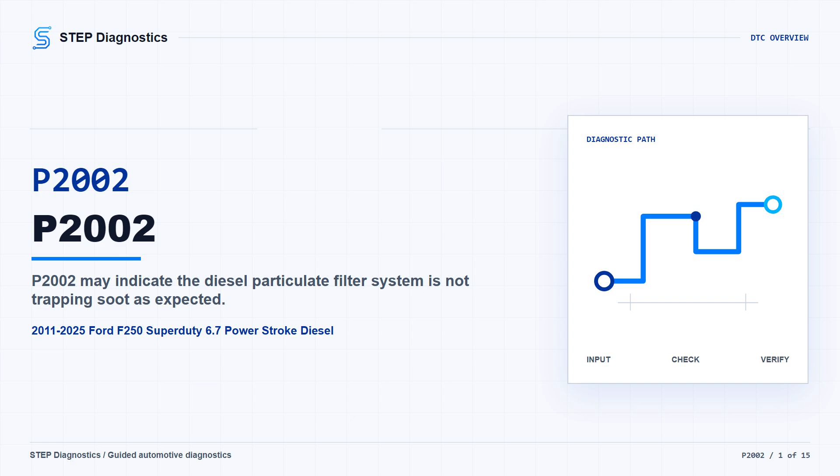Start with the basic system checks. If other engine control codes are present, handle those first before chasing P2002. Also repair any base engine concern before making particulate filter repairs, because coolant leaks at the EGR cooler, leaking injectors, oil consumption, or excess fuel in the exhaust can damage the filter and set this code.

If the PCM was reprogrammed or replaced before you got here, drive the vehicle for 8 kilometers, 5 miles, so the DPF PID data can update.

Fuel quality matters too. This vehicle calls for 20% or less biodiesel. One monitor gate to keep in mind is 150 miles, 241 kilometers, after the first incomplete regeneration. And if regeneration starts during testing, let it finish before continuing, because the readings can be biased during regen.

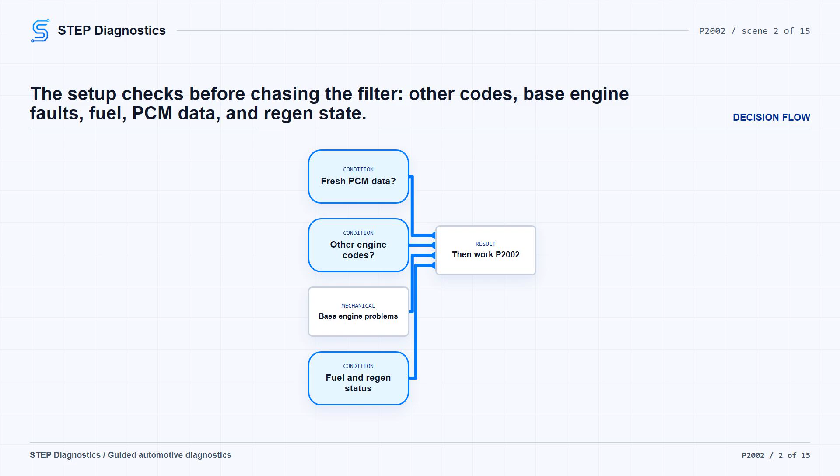Look over the PM11 module, PM11 sensor, PM11 wiring and module grounds for heat damage, harness damage, wrong routing, wrong connections, and poor frame ground connections. Also check for exhaust leaks at flanges, gaskets, and the PM11 sensor, and consider radio frequency or electromagnetic interference.

Next, look for contamination sources: unapproved silicone sealers, excessive oil consumption, internal coolant leakage, or unapproved cleaning agents. If a contamination source is found, fix the source, change the oil and filter, clear the PCM codes, and retest.

If that side stays clean, disconnect the PM11 module connector, turn the ignition on, and check C4861 pin 4. The voltage needs to be greater than 10.5 volts.

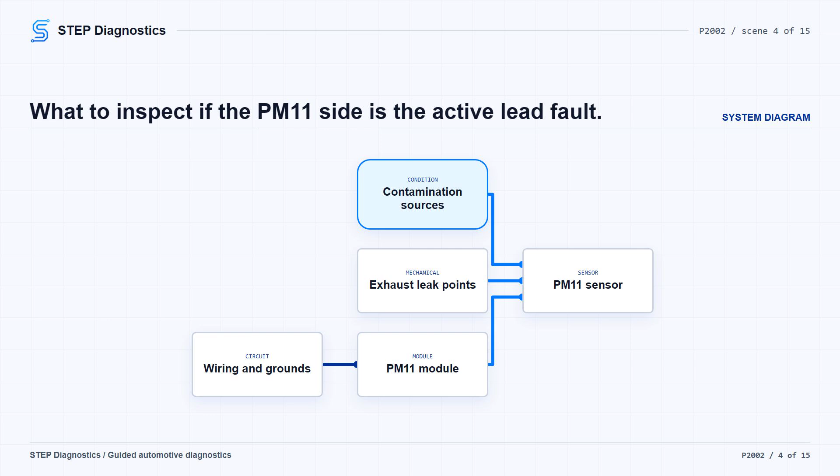Then, with the ignition off and the BJB-C connector disconnected, check the VPWR and ground circuits for excessive resistance. The passing value is less than 5 ohms. For the PM11 module open circuit checks, the passing value is also less than 5 ohms.

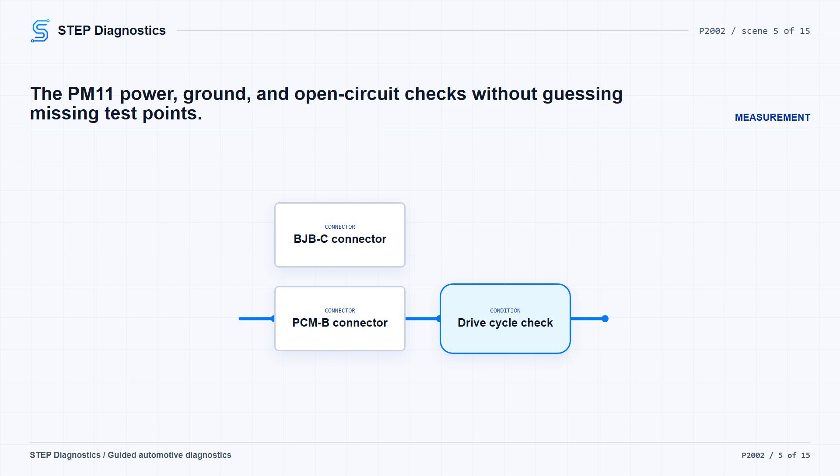If the circuit checks pass, carry out a drive cycle. If codes return, unplug the PM11 module connectors, inspect for pushed out pins and corrosion, reconnect them fully, and see if the concern is still present.

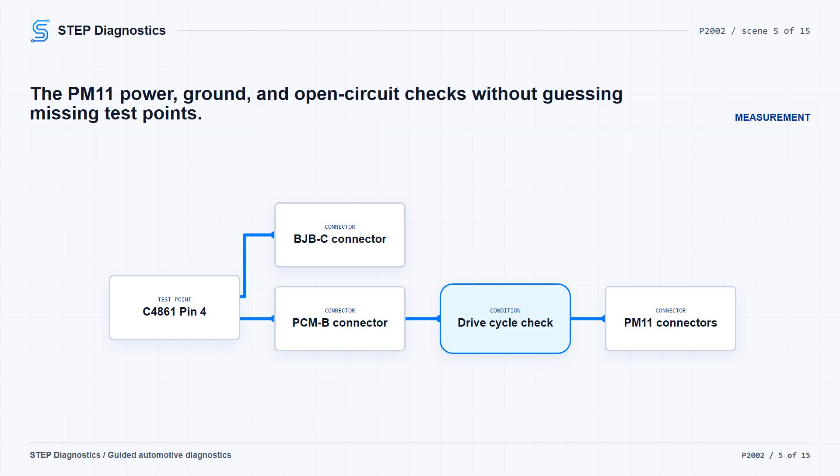If it is, the shared path supports installing a new particulate matter Bank 1 Sensor 1 module. If it is gone, treat it like a loose or corroded connector issue.

If no listed codes are present, the next check is for incomplete regeneration history. Watch the dist last regen PID. And if the dist last DPF value is between 100 kilometers, 62 miles, and 804 kilometers, 500 miles, the fault may not duplicate right away.

In that case, check for loose connections, damaged or corroded terminals, and wiggle the harness to try to bring the concern back before clearing codes and retesting.

If the pressure sensor side is the active branch, start at the DPF P11 sensor. With the ignition off, disconnect the sensor, inspect for pushed out pins and corrosion, then check the hose for leaks and the sensor port for restriction.

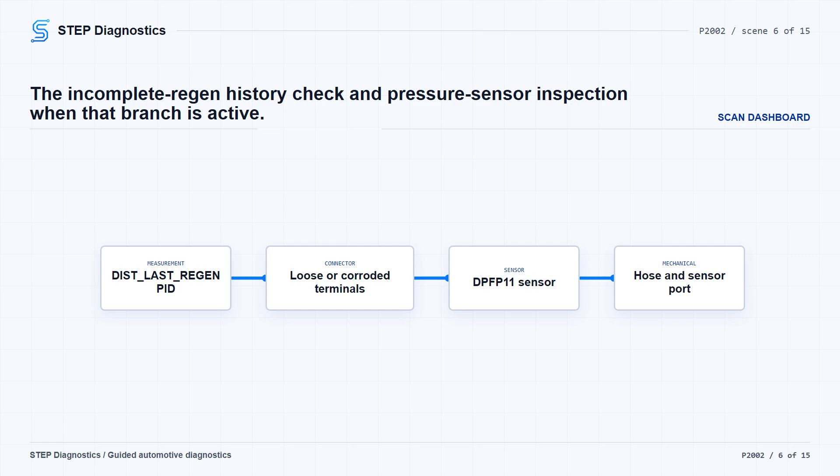Next, check VREF and SIG-RTN by measuring between C1471 pin 2 and C1471 pin 3 with the ignition on. The expected range is between 4.5 volts and 5.5 volts.

If the branch keeps going into the DPF signal circuit, disconnect the PCM-T connector and check for a short to SIG-RTN or ground. The resistance should be greater than 10 k ohms.

Then, check the signal circuit for an open between C1471 pin 1 and C1232T pin 81. The passing resistance is less than 5 ohms.

After that, check for a short to VREF between C1471 pin 1 and C1471 pin 3. The resistance should be greater than 10,000 ohms.

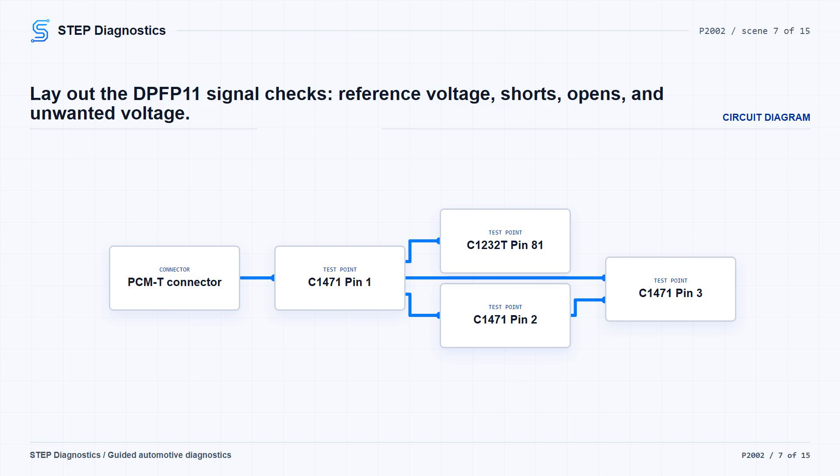Finally, with the ignition on, check C1471 pin 1 for unwanted voltage. If any voltage is present, repair the short and retest. If no voltage is present, save the PCM connector operation check for the end of the path instead of guessing.

For P2002, the path moves directly into checking for a damaged diesel particulate filter and exhaust system issues. With the ignition off, inspect the exhaust for aftermarket accessories, performance modifications, a damaged DPF, leaks, cracks, punctures, leaks in the DPFP11 sensor connecting hose, and tailpipe modifications that could change exhaust restriction.

Then remove the EP sensor and the EGT11 sensor. Temporarily plug the exhaust pipe outlet and use a smoke machine or equivalent through the sensor fitting. Pressurize the exhaust system with 137.9 kPa, 20 psi, regulated shop air, and check for leaks and restrictions.

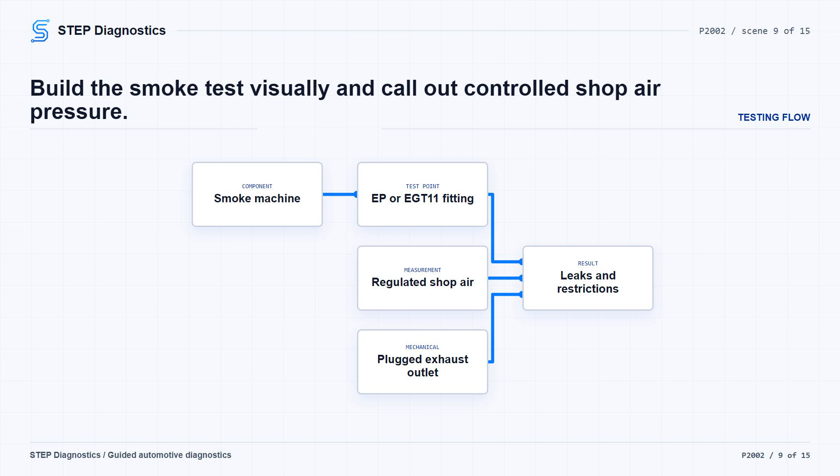Keep the air pressure controlled. Pressure above 241 kPa, 35 psi can damage system components. Reinstall the EGT11 or EP sensor when that check is complete.

If that inspection or smoke test finds a concern, repair it, clear the PCM codes, and repeat the self-test. If no concern is found, the next move depends on which fault is leading the diagnosis. Some nearby branches first check for other self-test codes and move on to the next active code before continuing.

Another branch checks the PTO circuit. Make sure the PTO switch is off, disconnect the PCM-T connector, turn the ignition on, and check C1232T pin 49 and pin 64 for voltage. If voltage is present, repair the short, clear the codes, and retest.

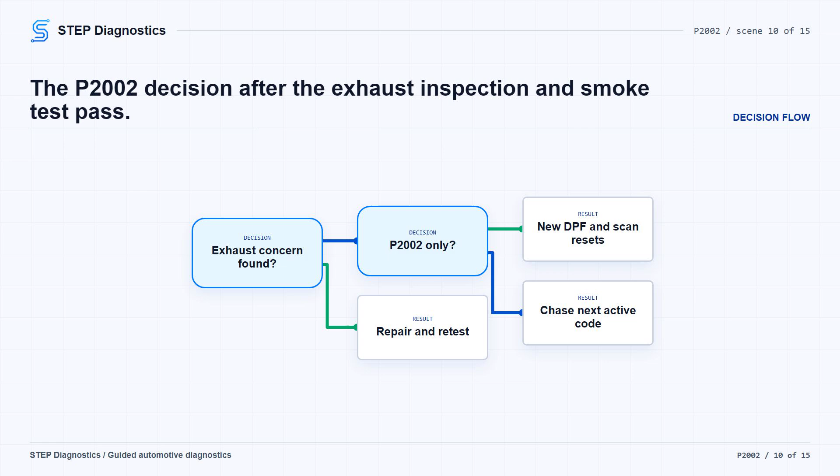A regeneration branch reconnects the DPFP11 sensor and carries out a diesel particulate filter manual regeneration with the scan tool. Do that only with the vehicle on the ground and the area around the tailpipe clear of people, obstructions, foreign material, and anything else that could be affected by the hot exhaust.

The intermittent pressure sensor branch watches the DPF INP PID while you wiggle, shake, and bend small sections of harness from the DPFP toward the PCM. If that creates pressure spikes, repair the concern. If it does not, that branch supports installing a new diesel particulate filter pressure bank 1, sensor 1.

Now for the target P2002 branch. If P2002 is not the only code present, stop treating it as the lead fault and diagnose the next active code first. If P2002 is the only code present after the exhaust checks pass, the path supports installing a new

diesel particulate filter. After that, carry out the DPF parameter reset and clear the oxidation catalyst function, initialize SCR learning with the scan tool, clear the PCM codes, and repeat the self-test.

If a manual regeneration does not complete, use the scan tool result to identify the concern that disabled it. Repair that concern, run the regeneration again, clear the codes, and retest.

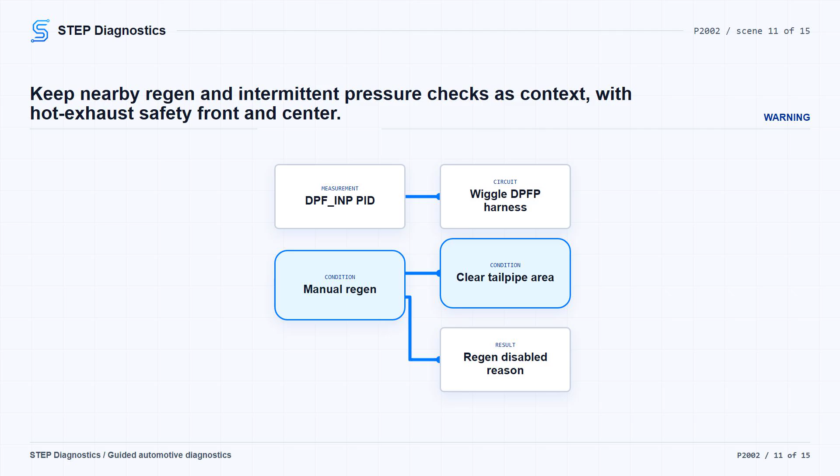When the path is dealing with soot loading or repeated regeneration concerns, talk with the customer about how the truck is used. Excessive idle time, excessive low-speed operation, multiple short trips, and shutting the engine off during regeneration can all stack up and contribute to the fault.

If those habits are present, advise the customer to follow the drive to clean exhaust message. Use fuel with no higher than 20% biodiesel content, run the manual regeneration with the scan tool, perform the DPF parameter reset and clear the oxidation catalyst function, initialize SCR learning, run the drive cycle, clear the PCM codes, and retest. Next, verify maintenance history and mileage.

The diesel particulate filter should have been repaired or a new one installed at 193,000 kilometers or 120,000 miles. If the vehicle is over that mileage, the path supports installing a new diesel particulate filter and then performing the reset and learning functions with the scan tool.

If mileage is not over that point, the remaining regeneration frequency path uses manual regeneration up to 3 times, then either installs a new diesel particulate filter if the concern remains, or returns the vehicle after clearing codes and retesting if the concern is gone.

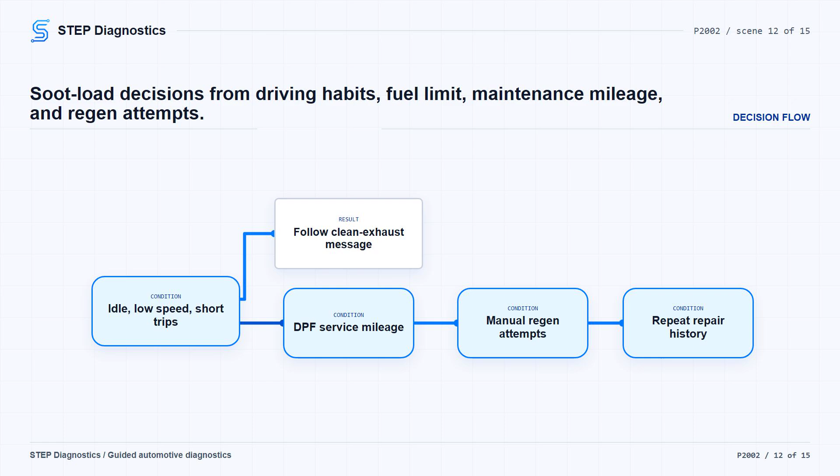If that regeneration frequency concern is a repeat standalone issue, check the repair history, run the regeneration and reset functions, complete the drive cycle, clear the codes, and repeat the self-test.

If the DPF signal circuit testing sends you to the PCM operation check, disconnect all PCM connectors, inspect for pushed-out pins and corrosion, then reconnect everything and make sure the connectors seat fully. If the concern is still present after that, the path supports installing a new powertrain control module. If the concern disappears, treat it as a connector seating or corrosion issue.

There is also a pressure sensor rationality branch that starts with a PCM self-test and other PCM symptoms. If that branch is the only active PCM fault, inspect the DPF pressure sensors and hoses for restrictions, leaks, and damage. Repair what you find, clear the codes, and retest. If it is not the only fault, diagnose the PCM faults first.

Finally, the related fuel vaporizer branch is a separate path, not the P2002 filter efficiency path. It starts by checking whether the fuel vaporizer faults are present, then visually inspects the downstream injector for damaged, cracked, or pinched lines and fuel leaks.

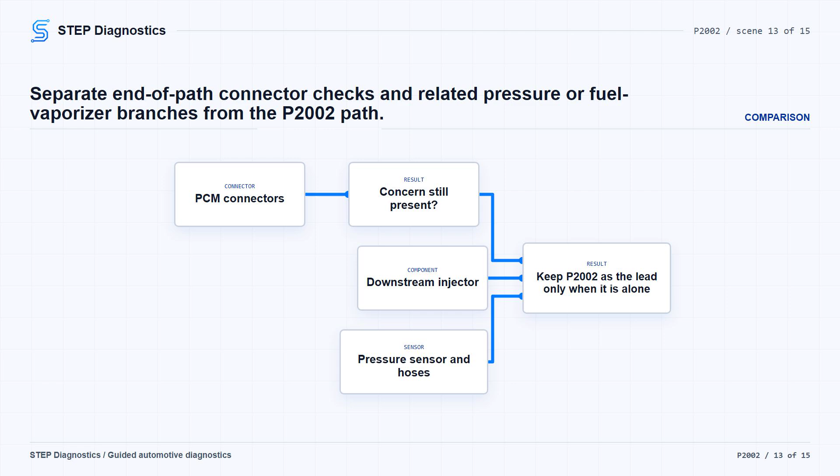For the downstream injector solenoid voltage check, disconnect it with the ignition off, turn the ignition on, and measure C1900 pin 1. The expected voltage is between 3.43 volts and 3.45 volts.

Then check the circuits for an open between C1900 pin 1 and C1232T pin 62, and between C1900 pin 2 and C1232T pin 61. The passing resistance is less than 5 ohms.

Check both C1900 pin 1 and C1900 pin 2 for a short to ground. The passing resistance is greater than 10,000 ohms.

Then measure the downstream injector resistance between C1900 pin 1, component side, and C1900 pin 2, component side. The expected range is between 11.4 ohms to 12.6 ohms.

If that fails, the path supports a new downstream injector solenoid. If it passes, reconnect the solenoid, remove the spray poppet from the exhaust pipe with the electrical connector still connected, install the injector test tool or equivalent, and run the downstream injection beaker test.

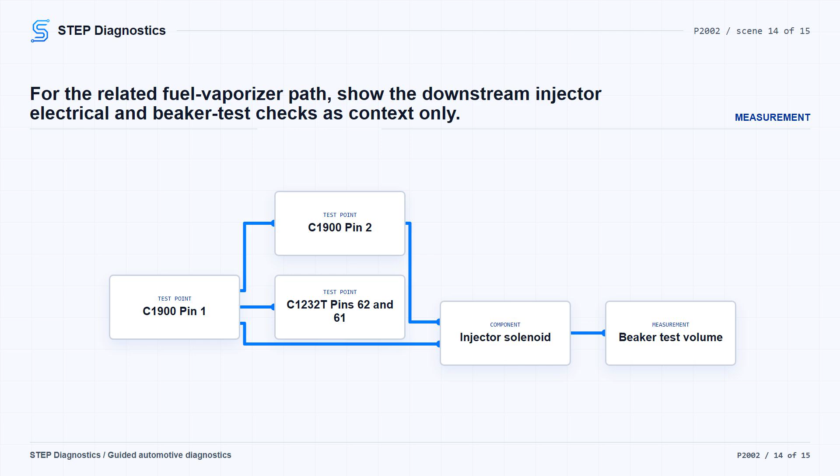The fluid volume should be between 90 to 110 milliliters, 3.04 to 3.72 ounces. If it is outside that range, that branch supports installing a new downstream injector assembly.

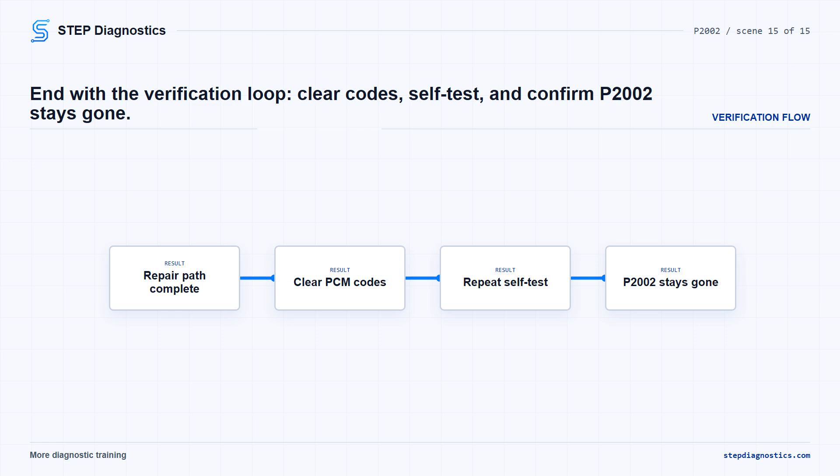Keep verifications separate from testing. Once the repair path is complete, clear the PCM codes, repeat the self-test, and confirm P2002 stays gone. The key on this one is not to condemn the filter until base engine concerns, exhaust leaks, hose leaks, restriction changes, and other active codes have been sorted out.